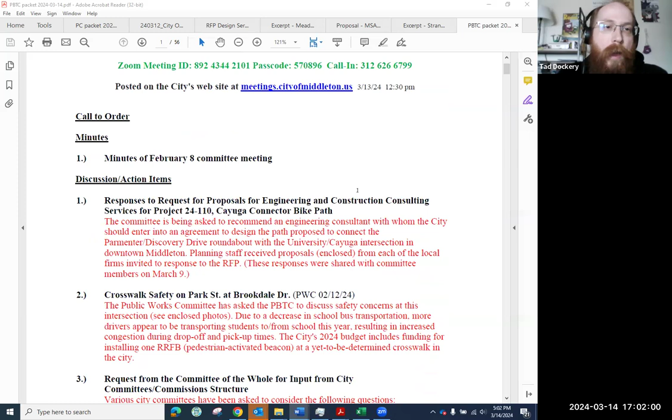Item number 1, response to requests for proposals for the Cayuga Connector.

Yes, I can start with this if you'd like, Tad. So we received 3 responses to the RFP that we sent out, one from each firm that I requested that indicated interest in responding. All 3 of them responded. So if that made sense.

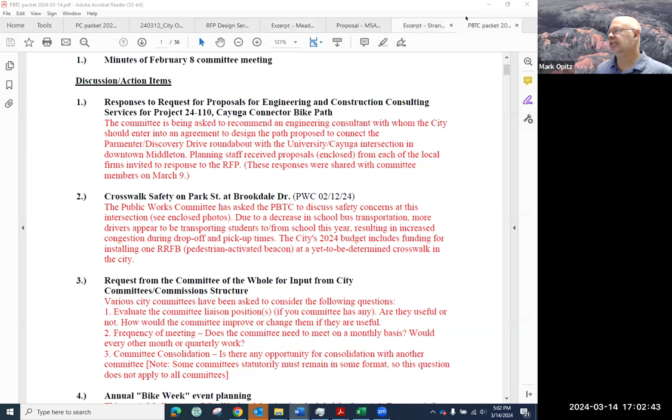And I sent them to you on Saturday, the day after the deadline, and I've gone through them. I also sent you earlier today a matrix, which I don't know how helpful you would find it.

Whoops, this is my work. And this is awfully hard to see, but Tad, I wasn't quite sure if you had a certain way you wanted to handle this. We have the 3 proposals in your packet. We could just have a free flow discussion. If you want, I could share my thoughts on it as well, but I wanted to defer to how you wanted to go about this.

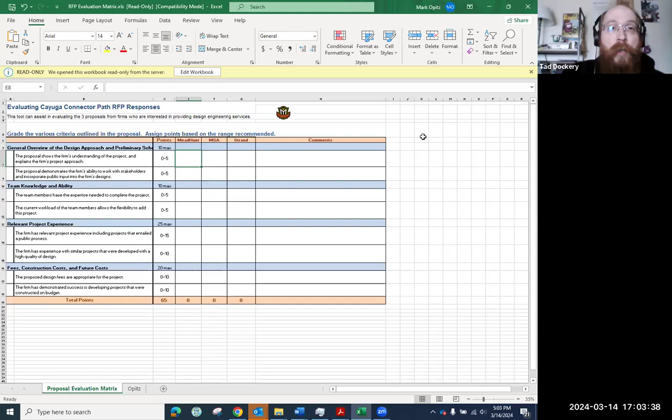So, I recognize I didn't give you this matrix earlier. What I guess I can do is share with you some notes I have. I'm going to put this on a separate screen. I would, if there's no significant objection to leading with Mark, that is what I would like to do. Okay.

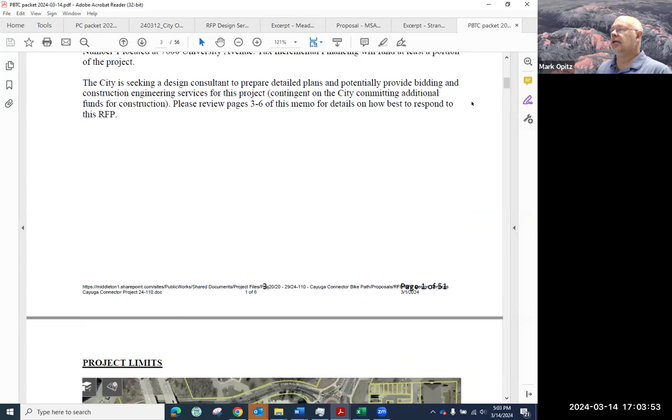So here's the original, here's the path corridor, as you have all seen. And responses that we got, starting with the alphabetical order here. The first one was Mead and Hunt. And what I liked about it, they were all good responses.

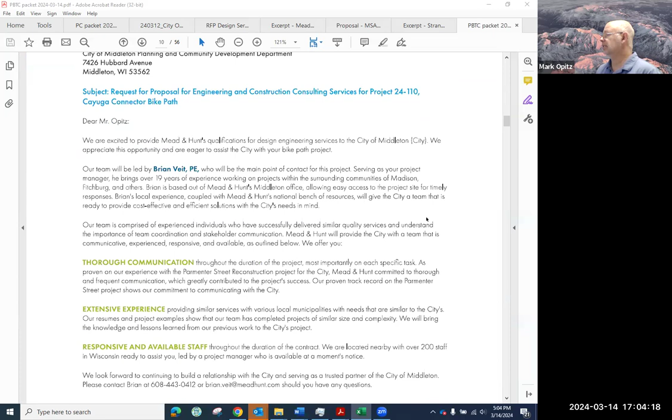I want to start with that. They really did a nice job talking about impacts to real estate and the need for coordination with the DOT. They really emphasized more than the others, a public engagement component. I don't want to just keep scrolling randomly, so I'll just pick a here we go. So they had this page that really stood out to me. I'm not sure how important that is for this project, but I defer to your input on that as well.

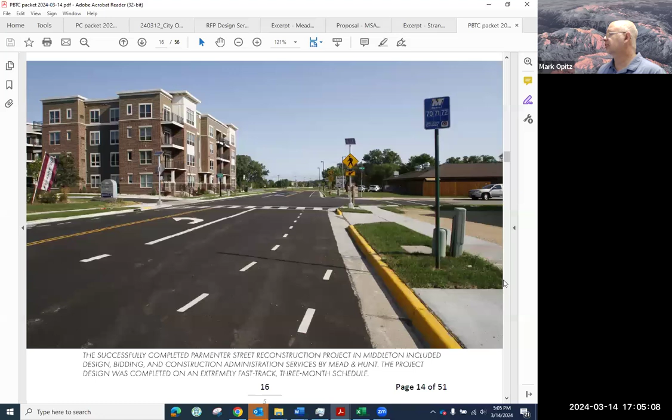It was not something we specifically requested, but it is something that they're emphasizing that stood out. They have ample experience with projects, pertinent projects, including this one. This was the Parmenter Street corridor that I worked with them on over half a decade ago now. So they were the project managers for this corridor. So that was, and then their fee is the highest of the 3 at $87,778. So that's a quick summary of Mead and Hunt.

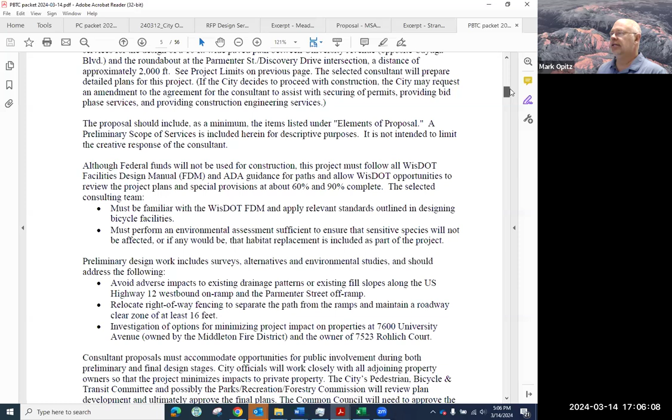They have also an emphasis on a public informational meeting, MSA does. They have emphasized also the need for coordinating with the fire district, which of course is the choke point here, and one other parcel is up by the—oh, let me go back to the map. So the 2 choke points are here at the fire station, and then this corner, which is a multifamily building, the back corner. Those are really the only 2 properties that would have any effect, would be impacted at all by this project. Everything else is right of way.

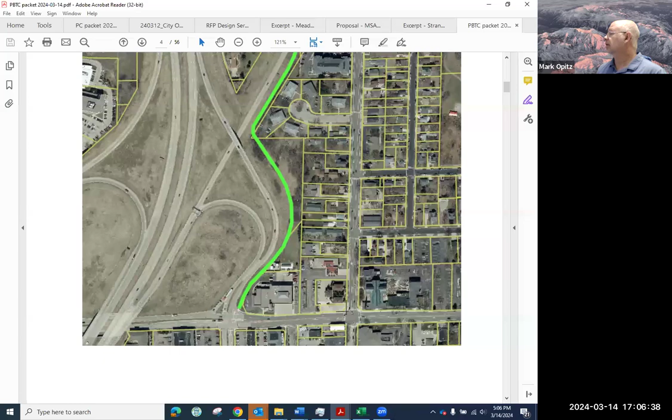So I liked that they recognized the need for DOT coordination, and they spoke about tree impacts and et cetera. Their fee was $75,339. The last proposal is from Strand.

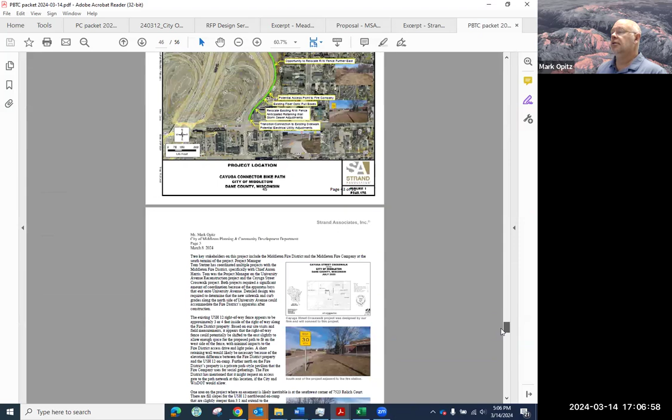Again, alphabetically. Strand is here. Oh, this is—okay, here we go, here's Strand. So Strand, what stood out for me with theirs, or well, several things did.

I really liked this initial survey that they provided, identifying potential issues, which demonstrated familiarity as well as anything. They also have already met with the fire district and talked to them about their concerns, their issues, the fire chief specifically. They said in their proposal that they have had initial discussions with DOT. They have, of the three firms, the most familiarity with the city. Not a requirement, but they have extensive TIF experience with working with projects in our TIF district.

Their proposal didn't call out as much the need for DOT coordination, but it's obvious on the map, and there's other indication in their proposal that they're aware of that. There's no reason to believe, based on past experience, that they don't know how to work with DOT—they have to in their job. So I'm not as worried about that. What they also didn't emphasize was public engagement.

I'm not even sure if it was mentioned, and that wasn't something we specifically called out as an area of emphasis. Because the project's largely in the right of way, any public engagement is something we can handle at the city's end too. So that's just my overview, my thumbnail sketch.

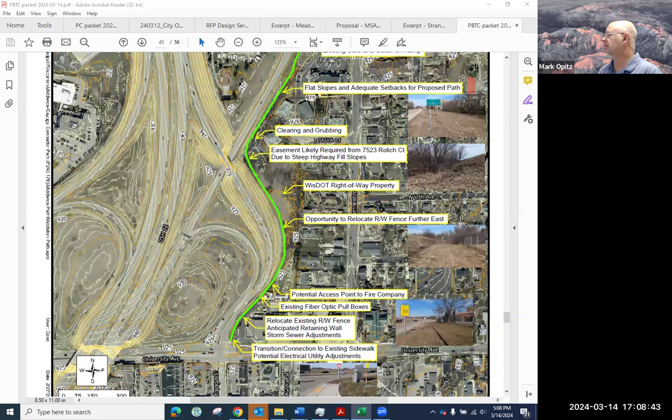I don't want to do all the talking—this is your decision or recommendation to make. So I'll turn it back to you, Tad. Oh, and I'm sorry, the fee for Strand was $49,500, which is $26,000 less than the second lowest. So that caught my attention as well.

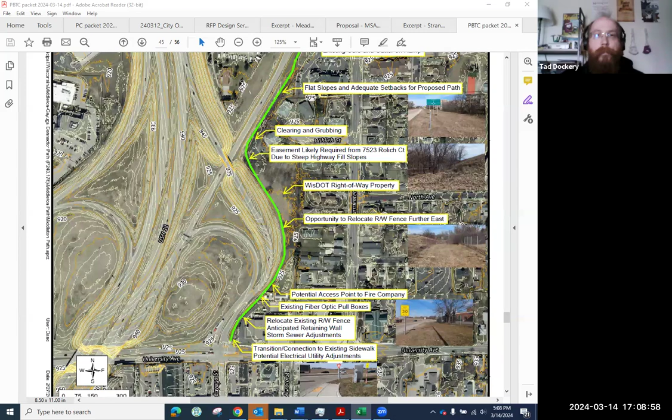All right, Kerrie? Thanks, Mark, for the summary—that was going to be my question. Do we have the costs written down where I can just quickly see them? I know you just said them all, but do we have those? Yeah, so those, let's see here.

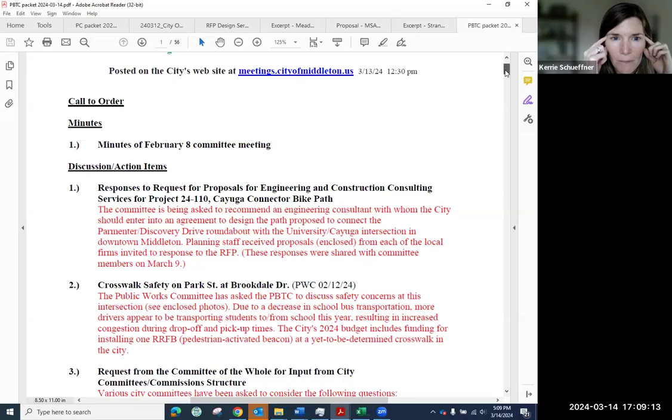This one is Mead & Hunt's. Oh, I forgot to mention that—what I did not emphasize was timeline and deliverables. Mead & Hunt said they would have the final design completed by April of 2025, whereas MSA and Strand both said November of this year. So Mead & Hunt was an outlier in that respect.

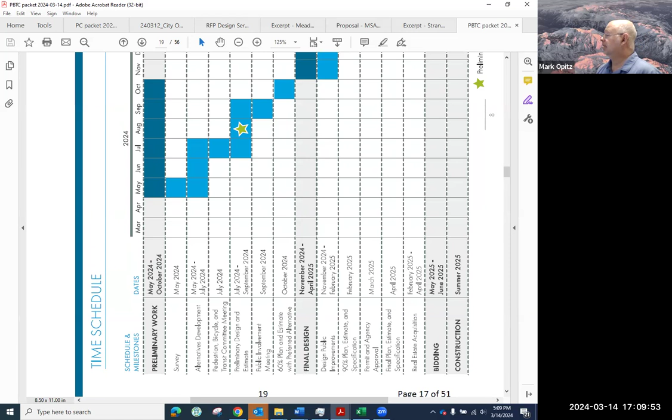Cost-wise, they were at 87,000, and it's in their proposal—I don't remember where exactly. Oh, here it is, right at the bottom: 87,778, based on 663 hours.

MSA was, here we go, 75,338 and change. And they itemized their hours here as well.

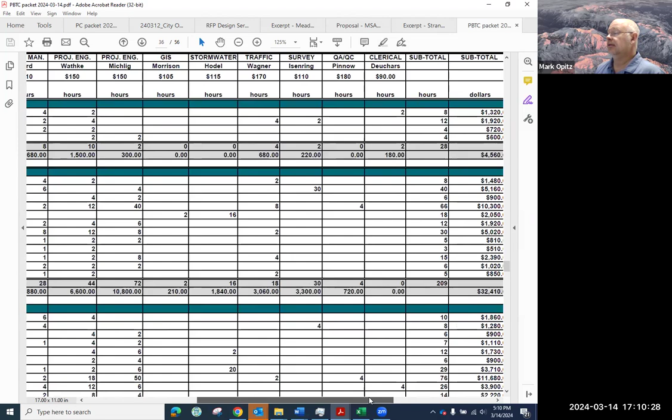And then Strand is, so it's a little harder to glean, but it's right here. Okay, 49,500. So that's pretty significant. Yeah, I thought so too. And that might be because of not including public engagement, those type of things, which, to your point, I don't know if it's necessary as much. But anyways, thanks for that quick overview of costs.

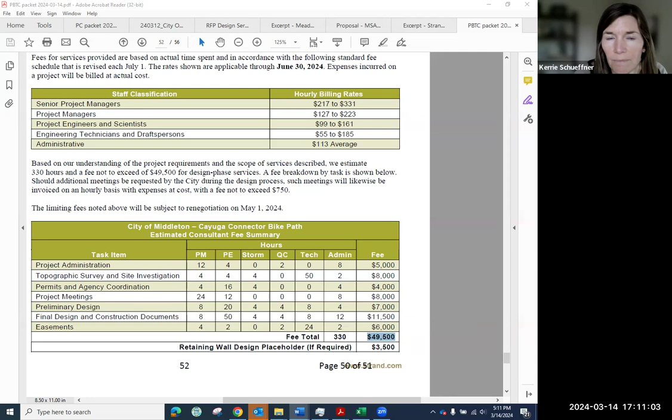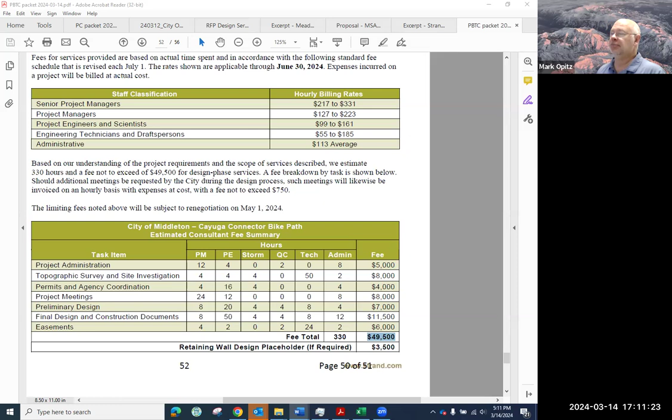Jim? Ted, did you want our assessment now of each? Yeah. I didn't give you much time with that matrix, so I wasn't quite sure. Honestly, I was in vacation mode until Tuesday, so I wasn't as prepared for this meeting as I would have liked to have been, given that these came in while I was gone. So go ahead, Jim.

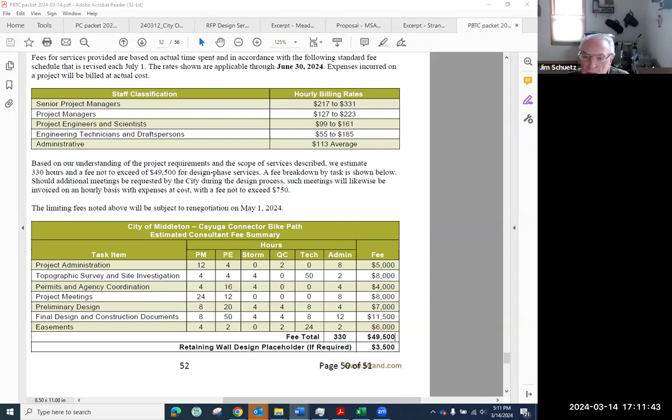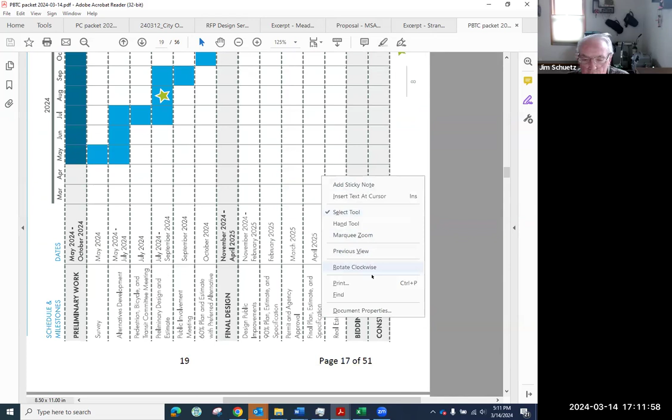Okay, I didn't score it on the matrix, but I looked at it. I didn't like Mead & Hunt for a couple reasons. One is they were taking 6 months for a preliminary design, and another 6 months for a final design. They talk about being ready to bid it, I think, in the spring sometime.

Or was it April and May? It was here, being ready to bid—let's see here. Oh yeah, May, June timeframe of next year. And I'm thinking that by that time, construction companies are quite busy, so I don't see their idea of construction happening in the summer of 2025. I just think this is a little too drawn out.

The other thing is, I think there's a little too much emphasis on public engagement. That'd be quite different if we were talking about this path going along Century Avenue, but for the public, I don't see as much impact on this one. So I really didn't consider theirs.

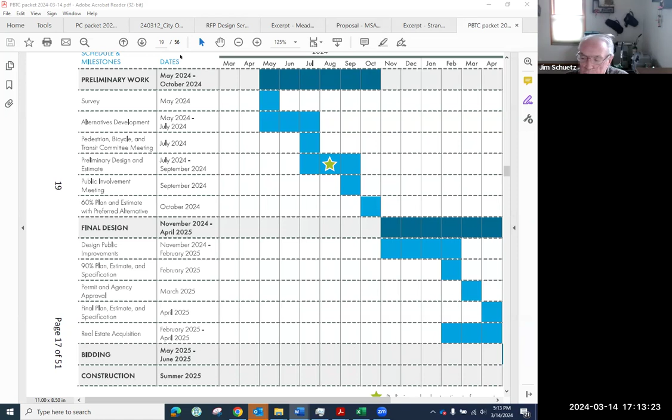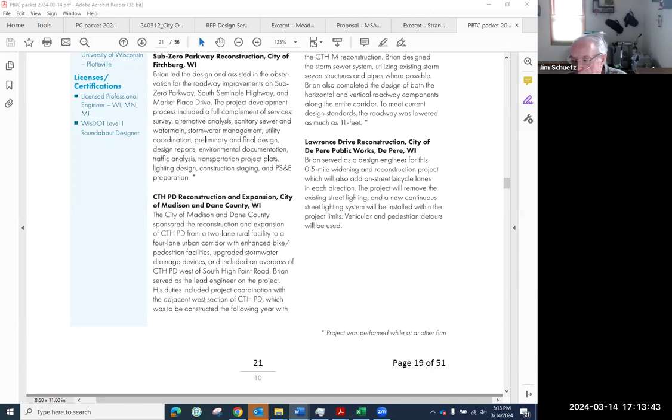The other two, between MSA and Strand, I thought they were both good. I got a sense from them that they really had some effort in evaluating the project. I like that both of them said they could complete it by November, so that would allow for bidding the project in early spring.

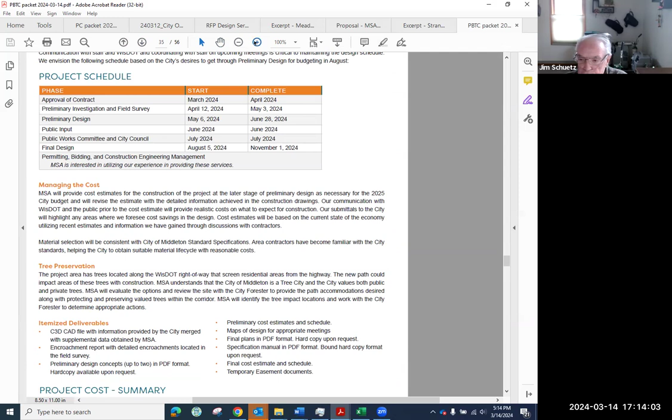Again, what I really liked with this is, with Strand, the fact that they have had that much involvement with the city. And that also—they went into quite a few specifics where they could see potential problems or issues that had to be addressed. So in my opinion, I thought Strand had the best bid.

There's a couple hands up, Tad. Yep. Kirsten.

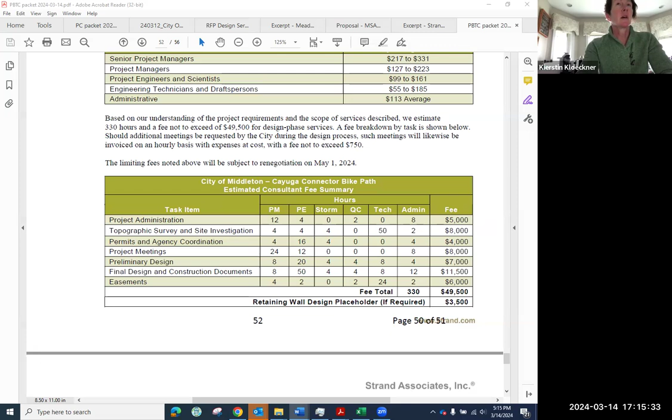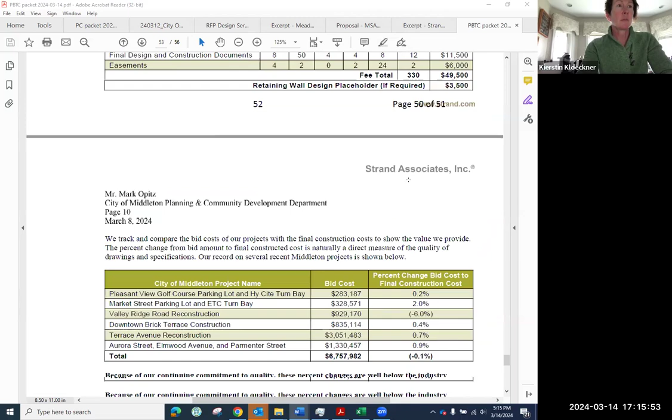I went through all these as well, and I agree with Jim on the timeline concerns. I've worked with Strand on several projects, and I know they've done several projects in Madison as well for bike ped infrastructure. They've been tested and true, haven't heard of any issues with them. My only concern is the price discrepancy. I'd be curious when we're seeing a discrepancy of almost half of the highest bid. That does raise some red flags, so I'd be curious why Strand's rate is so much lower than Mead and Hunt. If we saw a $10,000 or $20,000 discrepancy, that's one thing, but when it's that big, I'm wondering if they're leaving something out, and we just want to make sure of that.

But I did like Strand's proposal the best as well. My only response to that, I don't know the answer why theirs is significantly less. That is unusual to have such a range. But I have every confidence that they have a comprehensive view of the project based on all the work they've done with other projects over the years. And I did check with the city engineer about all three firms. He said he considers all three of them perfectly qualified, they've come in within budget with no concerns about missing things, and he would have no hesitation to work with any of them. If that helps allay your concerns.

By the way, what I envision coming out of this discussion is hopefully a consensus or a motion to recommend one of the firms, which would then be a recommendation to staff or to the council. Before it goes to the council, we would reach out to that firm and put together an agreement between the city and the consulting firm. That would probably be done for the April 2nd council meeting.

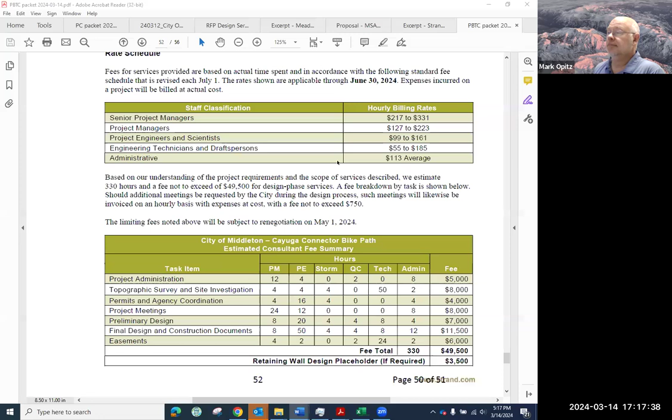More hands up. Ted, oh, we can't hear you. He's trying to tell us something, he can't unmute himself. I just asked to unmute. Nothing's happening, we can't hear you. I can't read lips, I'm sorry. Ask to unmute again, anybody else get a sense of what he's saying? No, I can't read lips either, but he's clearly concerned. I think he's asking to unmute? Are you unmuted? I've tried asking to unmute several times. John. Oh, he's calling on John. Oh, okay, he wants John to chair the meeting.

Okay, all right, thanks, sorry, well since my hand's up, I'll just say I have worked with Strand and found them to be very, very great and nice. I think part of the discrepancy issue, as I see it, is seeing this in home repair stuff, that it's not that big a job. So for some of these companies, they may be busy and not that interested in a job considered smaller, so they just bid high. But I'm totally comfortable with Strand, and I don't think the $40,000 difference in the price tags is going to make them screw up this job. So that's my feeling about it.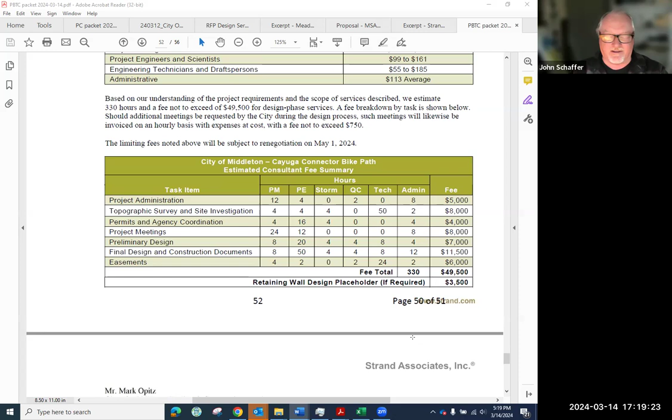All right, Carrie, you've had your hand up for a while, go ahead. I was just going to say the same thing, I agree with Jim's assessment and your comments. My vote would be for Strand.

Okay, Mr. Rhodes. So I did fill out the matrix. MSA and Strand came out the same on mine. And being the steward of the district's money, I would say Strand would come out on top there as well. That would be my vote. What did you say about MSA? It came out the same as Strand, I had them at the bottom when I did the sheet. They came out tied.

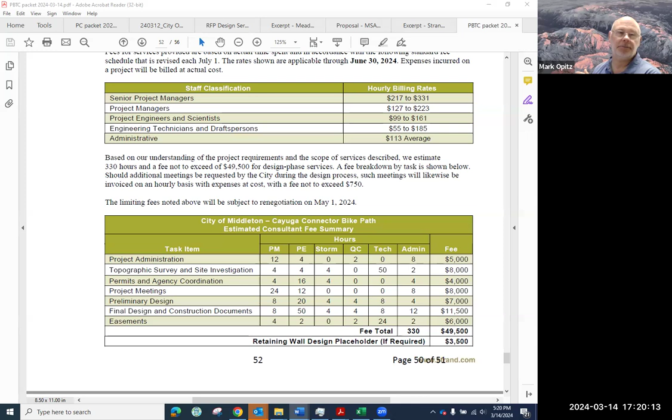Oh, so Strand and MSA were essentially comparable, is what you're saying. Yep, okay, got it. You can save $25,000 if you go that way.

Well, since I'm unofficially chairing this, I'm hearing a sense of a consensus. Maybe this is the time if anyone wants to make a motion to look at going towards Strand.

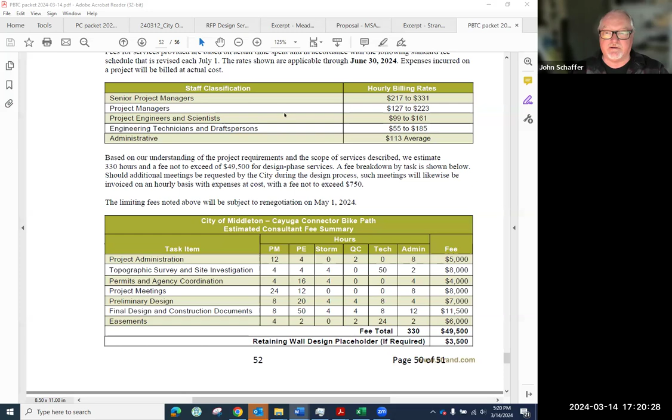I move we go to Strand. All right, we have a motion. Do we have a second? I second. We have a second, but I didn't know who seconded - somebody's taking minutes on this. John, you recognize who the second is, and I will record it. Kirsten seconded, and Jim Ray. All right, so any further discussion with the motion on the table?

Tom, I wanted to bring up one thing - is there any way that we can change the name of this project? It's listed as bike path rather than a trail path.

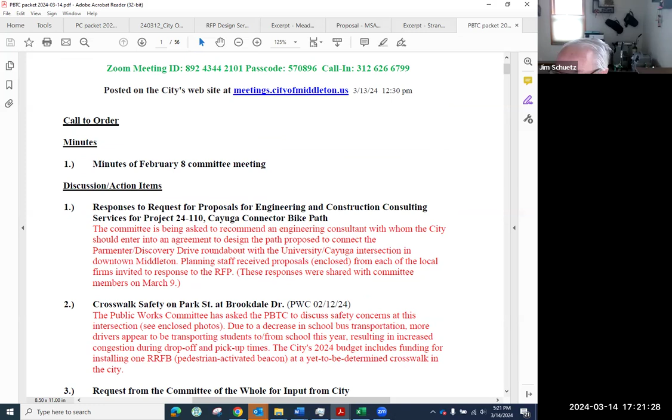Cayuga Connector - I've just always called it the Cayuga Connector. Is that the concern you have, or do you have a concern with the word bike? I have a concern with the word bike. Yeah, I understand, it doesn't need to have the word bike in it. I don't even know why I called it bike path - I might have gotten that from our system, someone had called it that. I'm happy to make sure we call it the Cayuga Connector Trail or shared use path instead. That's fine, as long as the contract is saying the same things, it doesn't matter what the title is.

Ken, you have your hand up. Mark, a while back we talked about the National Bicycle Trail going through Middleton - is this going to be part of it? No, that comes down Parmenter Street, on street routes. I think interest in signing that has petered out in the region. I haven't heard anything about it lately. But I really like that idea because it does use paths in certain jurisdictions, and I don't see why, if it comes out at Cayuga, it couldn't ultimately go down Elmwood Avenue. So we could route it that way eventually, but let's not worry about that right now. That's an interesting idea though.

All right, Jim, you and I share the same amount of hair on top, but I'm only seeing the top of your head. You might want to adjust your camera a little bit - I've got from your glasses up. There you go. Thank you. That's better. Much better. Move back a little? You're better looking than I thought.

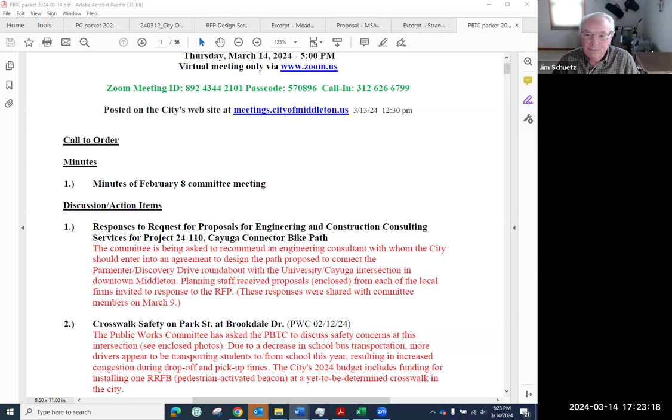So that's it - it's to recommend entering into an agreement with Strand. That's correct, Strand, sorry. Okay, that was the motion, and that was Tom's... so it was Yost who made the motion, right? Yes.

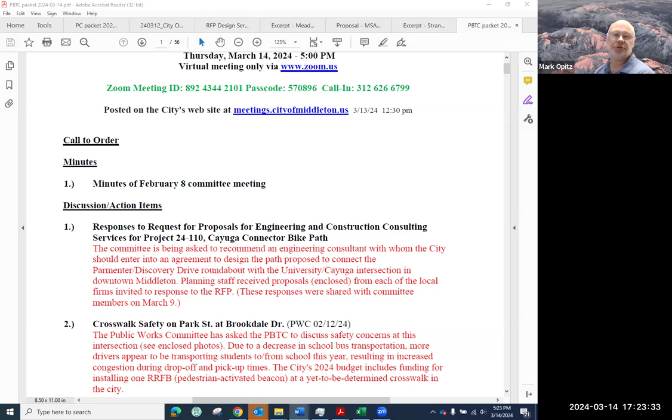Okay, thank you. Tad, you're still out of commission? I am back. No? Oh good, you can take over again. I'm sorry we couldn't understand you right away. No, I apologize, I was looking at the proposals and letters. That was good, except it was... even it was the right way - well, right way for him, but they were backwards, but it's okay.

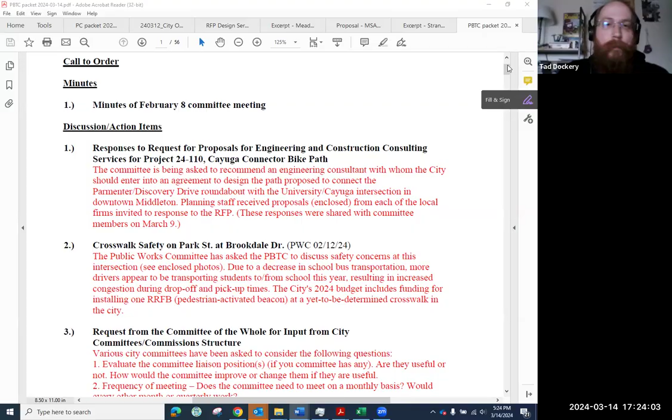All right, so moving on to crosswalk safety on Park Street at Brookdale Drive. Carrie, would you like to lead with this? Sure, this was a referral from the Public Works Committee. I brought this up to Public Works, and unfortunately I wasn't at the meeting when they discussed this, but they referred it to Ped Bike, which I think is great.

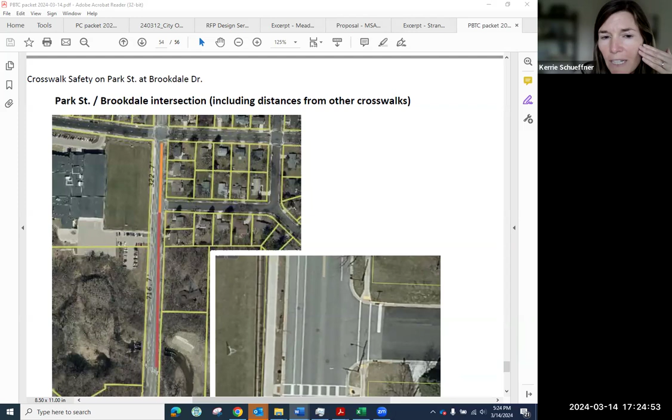I just wanted to see what options we have for pedestrian safety at this intersection of Park Street and Brookdale. Kromrey is on the left here of our screen, and I have two daughters that go to Kromrey, so I'm really familiar with the pickup situation there. A couple months ago, at that crosswalk, there was a child on their device walking across the street, and a car was coming, and they basically just barely missed - it was so frightening that I was like, I need to bring this up to the committee to see what we can do.

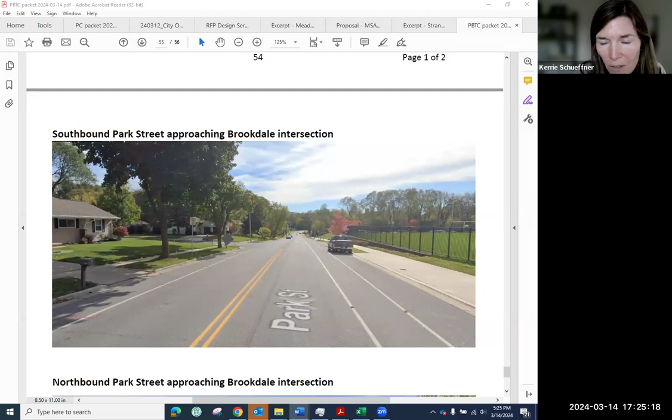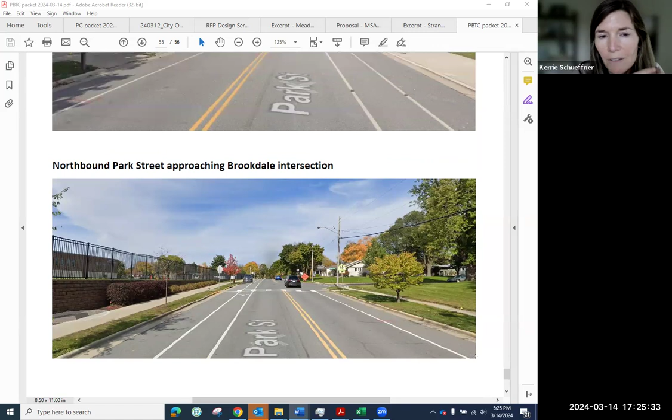What's happening is that parents are parking on Brookdale, and kids are coming down the sidewalk and crossing over to Brookdale. There is a crosswalk, so they're using that, but there's a lot of traffic at that time of day - high school traffic, kids coming in, Kromrey parent traffic. There aren't sidewalks on Brookdale unfortunately, but people are still using that for pickup. Ideally it would be great to have more crossing guards at Kromrey. The four-way intersection is also problematic.

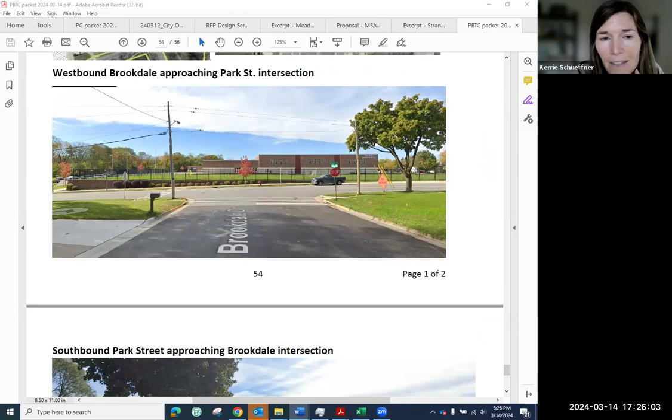This in particular, I just saw this happen, and my daughters have also commented on this as well. I don't know if anyone else on the committee has concerns about this, but I just wanted to see if we have any potential solutions. And then that four-way intersection is another area.

There is the lighted crosswalk - what do you call those again? The RRFB, the rapid rectangular flashing beacons. Yes, that's it. There is one of those down further on Donna Drive at the main entrance to Kromrey, which I think is helpful.

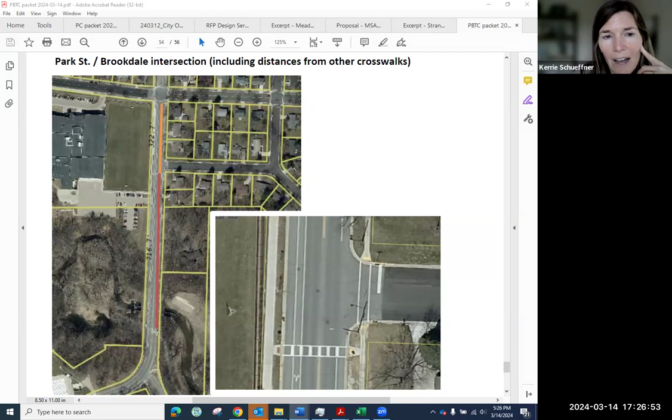So one option is maybe having another lighted sign there. I think a crossing guard would probably be even more effective, but I don't know where the funding comes from for crossing guards - is that something the city provides, or the school district? Anyways, that's the topic I wanted to bring up.

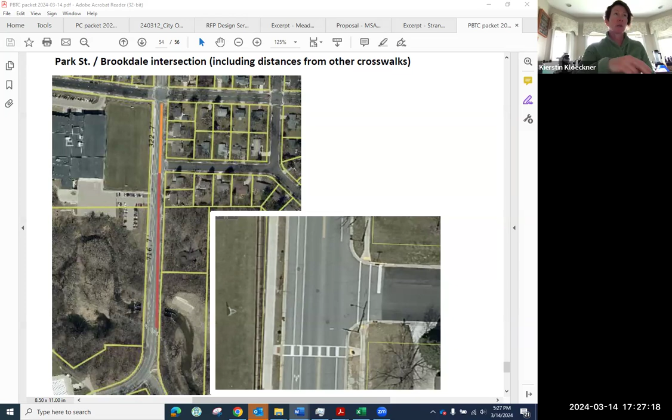Yes, I walk that area a considerable amount, and I think one of the biggest issues is that during school pickup and drop off, all of the cars are parked along that section, and so when kids start to walk out, they're almost invisible walking - it's almost as if they're walking through cars. We have the RRFB at the path, the creek path, and then the RRFB on Donna.

One thing we could try is having the flags - I think having another RRFB that close to the creek path RRFB might be troublesome. We could try having the flags, the bucket with the flags on each side. I think a crossing guard would be great because traffic in that area is high speed and very congested at both rush hours. I have seen a lot of drivers drive very recklessly there, even though police officers are oftentimes there.

But one of the problems is the parked cars, and that blinds that area when kids are crossing. But we can't get rid of the parking spots because parents would have a conniption fit. So I'm wondering if we can also use paint to highlight that area a little bit more, the green paint, or any type of raised crosswalk area, just to make them a little bit more visible.

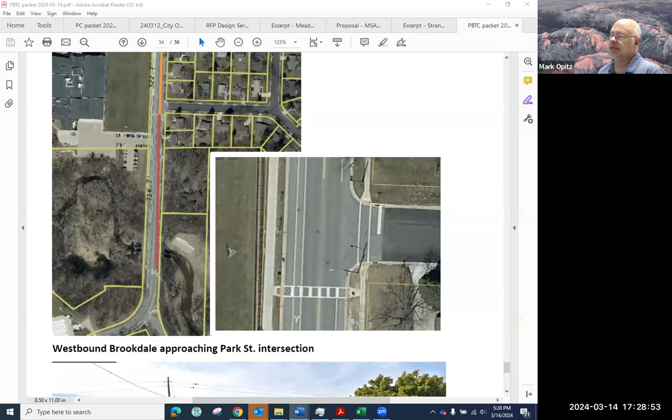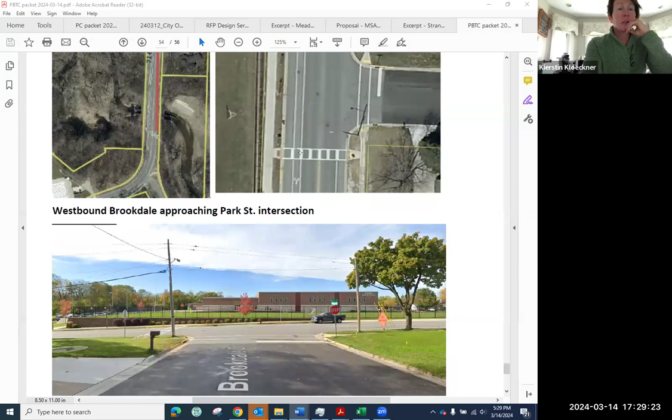I don't, but I can tell you that that's almost always blocked, during school. Actually, here's the answer - you can see the yellow paint here. Yep, so 15 feet - I want to say 15 feet. That was my guess, but the point remains. This is a good example - it shows how a kid that's leaving the sidewalk and entering the street is not going to be seen right away. It's probably very hard to see, especially for you, Jim - sorry, what I'm pointing to. But if you could have - let me blow this up here.

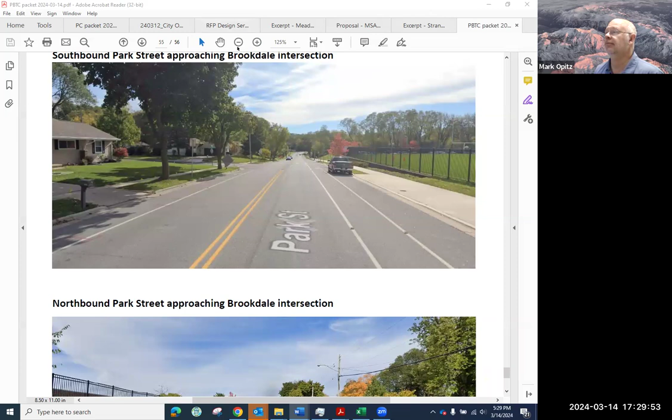You know, if there was something built, if this were a curb extension that came out, that would help. Just an idea.

I think those are great ideas. The other thing I wanted to mention is there are 5th graders through 8th graders. Sometimes I've heard there's not as many crossing guards because they're saying they're older kids, but these are still really young kids. 5th graders are still 10 years old.

Could we do a traffic calming median there that would slow traffic down? Do we have the room with the bike lane? I guess we would have to bring the truck back or the parking back too.

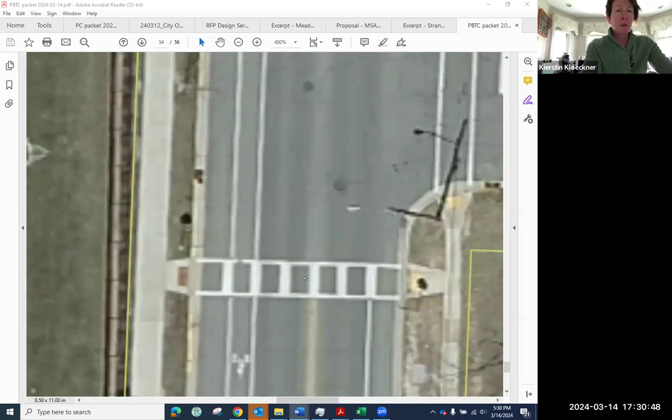Oh, I apologize for that. But I'm wondering if we could do a median in the middle as well, and that would narrow the lanes and act as a calming device.

The effect of that would be, in order to keep the bike lanes here, you can see where I'm drawing, this would have to have a median that is, 6 feet is ideal, but we might not have that much room. 6 feet can hold a bicycle as it's crossing the street, but you would have to lose the parking lane back here. It'd have to taper down and then taper back. So you'd probably lose a parking space on each side, but you'd gain the median then.

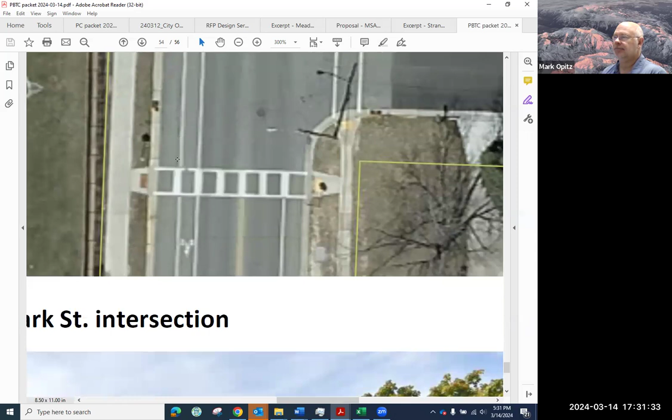I like the idea though, Mark, of your bump out. If you had the bump out back enough that it actually kept cars from being too close to the crosswalk. So imagine a bump out that was say 20 feet long. That would mean no car could accidentally or purposely go past into the yellow curb and park there, and guarantee that you'd not only have the bump out, but you'd get a blockage of a view. That couldn't happen because the bump out was far enough.

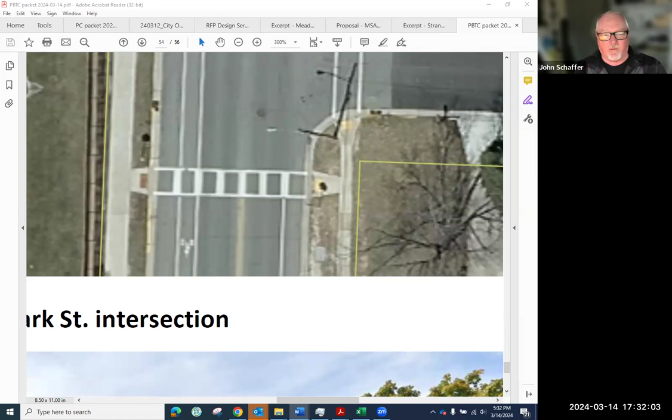That seems to me more logical because the street's pretty narrow there, and trying to put something in the middle is going to cause maybe more complication because now cars will be swerving over towards the right side and the kids are there.

Well, there's the bump out, I mean the median, at North Avenue and Park Lawn, and that sign gets hit quite a bit. Yeah, let me just go to that.

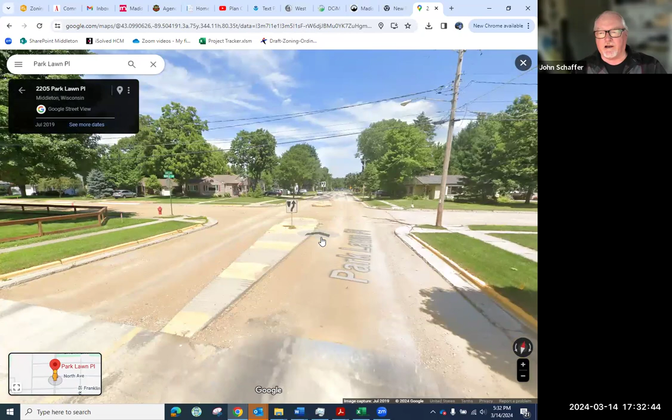The only disadvantage I can think of with the curb is the snowplow drivers. It's gonna be harder to keep that clear. But that's a diminishing worry now, right? Well, yeah, so this is an example of what Kirsten was mentioning. What an old photo, wow.

I think an object like that is probably better than the light. So yeah, I would say this is 15 feet. Actually, there's, yeah, see, you've got the fire hydrant.

If you somehow did a bump out so that you started right after the fire hydrant, so essentially nobody could park within 40 feet or so of that, you'd lose literally one spot is all you'd lose. The only other concern is drainage.

Playing the role of engineer here today, the good thing is that this inlet slopes down this way. So the water would come in here, and then you could design this so that it would bump out, and that probably wouldn't be a big problem for drainage at all, actually.

No, I think you could just move that drain thing a little better, funnel it down somehow. Actually, I like that it's there, because then you bump it out and the water's not going to get blocked. So I think actually this could work really well.

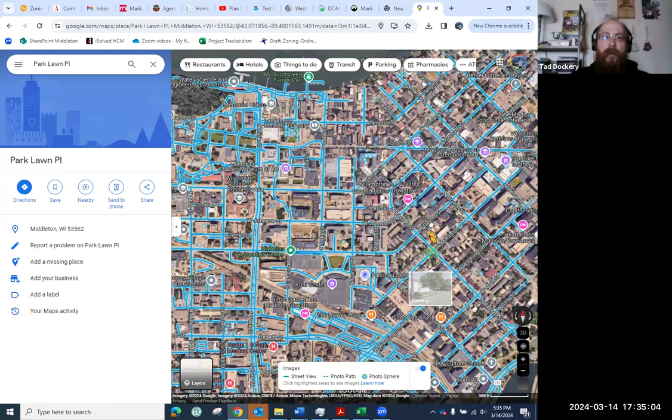A way to avoid drainage issues and still get your bump out would be to swap the position of the bike lane and the parked cars, so the bike lane is interior and defended by the parked cars. That's what most cities are doing now. Then have the bump out floating out from the curb. You'd still have the bump out pushing cars back, and it wouldn't block the drain channel, which could make the engineering easier.

So this is a bummer, I was hoping this was done. What Tad's describing is unfortunately not available on Google Street View yet.

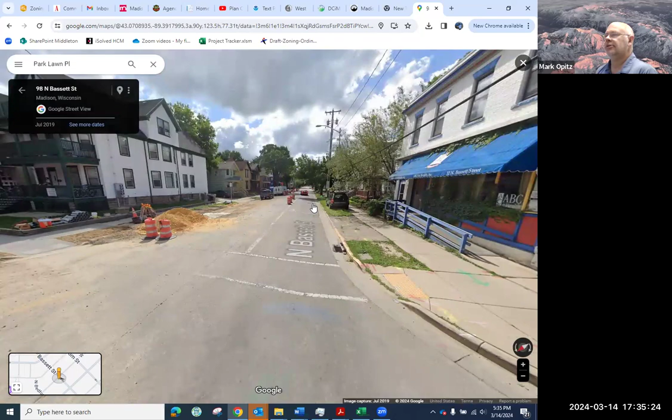There's an example on Bassett Street in Madison where this has happened. Is there another local example you can think of, Tad, something that's been in place for a while? I can envision it, but... oh, actually, here we go, the aerial photo works. This is even better. Yes, exactly like that.

Not sure if there's quite enough room on Park Street to do this, but this keeps the bike lane to the right of the vehicles where they're parked.

Kerrie: Normally I would like that type of bike lane configuration, except in this situation where people are dropping their kids off, the chance of getting doored as a cyclist goes up much higher as kids are jumping out of the car from the passenger side. Good point.

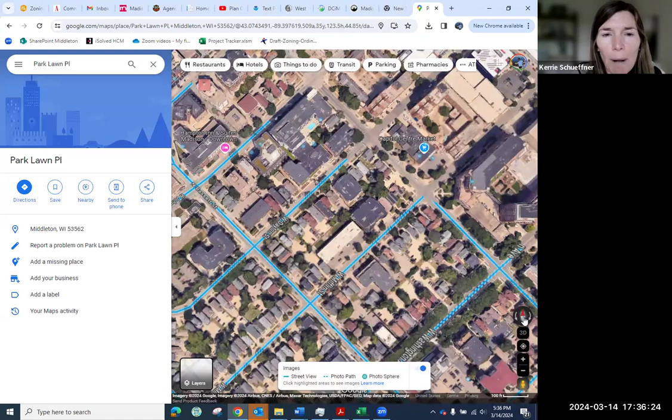I also wanted to mention this is probably a major issue for like 15 minutes of the day during the school year, mostly at pickup time, not even drop off necessarily since drop off is more staggered. But at pickup, everyone's trying to get there at one time. So that's why I like the idea of the bump out. But crossing guards also come to mind as a solution, though I don't know if that's something the school has to ask for.

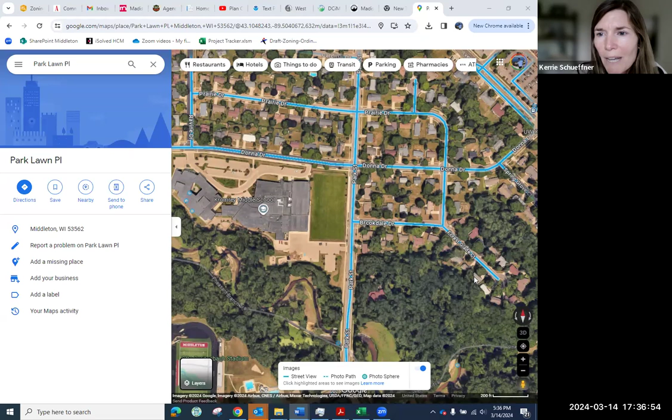I don't know the process for that. What I have heard is that staffing is an issue, they have trouble getting crossing guards, but I don't know how pervasive that is, if it's as much of a problem as getting bus drivers. John, you would know about bus drivers. I know about bus drivers.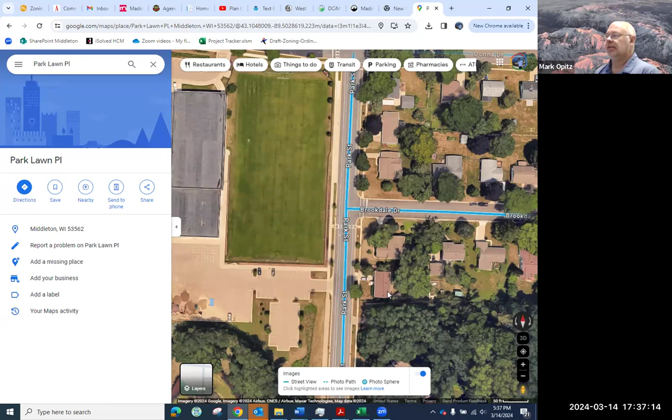There is a crossing guard, I believe, at Kromrey now, over at Ravine or Northbrook, one of the two. Isn't there one there now? Yeah, at Ravine. Oh, and that's a good example of where there's a median in the middle, which I think has a benefit in terms of channeling traffic, but it makes this left turn a little weird for people. Still, pedestrian safety is the most important factor.

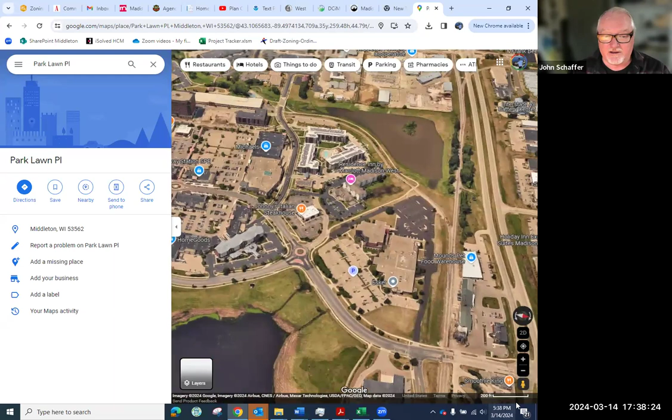So I don't have a strong opinion on this, but this is one of the options we were talking about. Further down on Park Street by Terrace, when we put that little island thing in the middle, it got rid of 90% of the problems of people not knowing whether they're supposed to slow down or stop. It forces people to pay attention, and maybe that's half the issue, just anything that causes somebody to not just drive but pay attention that there's something there. I think a bump out or a center island would both do the same thing.

My question, though, is I don't walk by here, but I do pick up middle school kids on buses, and the thought that they all walk down the sidewalk until they get to that crosswalk and cross there - my sense is that doesn't happen much at all. They're probably just bolting across the street anywhere they feel like it. It may be a problem that can't be fixed.

I don't know, this is the bump out example, and at Greenway Station we've got some of these. Jim: the thing about the island in the middle, I think that can work very well for traffic.

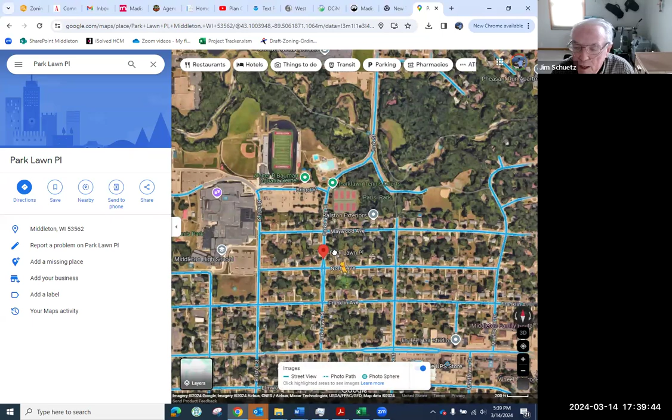But if we're talking heavy pedestrian use, what happens there in the winter is the crosswalk part of the island doesn't always get cleared. And so if you've got a bunch of kids, as you said, a lot of them just avoid things like that, so I don't know how helpful that would be.

So you're saying that this part doesn't get shoveled out? No, it probably does initially, but what I'm thinking of is when the snow plows go through again, that has a tendency to get a lot of ice buildup there. You'll get some people who live on the corner that might go shovel it out, but for the most part, it just stays that way. Yeah, and so what you wind up doing is you wind up walking around that.

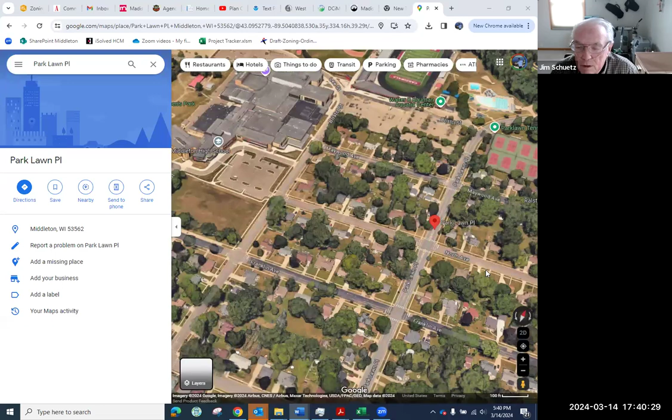Whereas the advantage of this curb extension is that it's an extension of the sidewalk, and so that gets cleared by the adjoining property owner as a matter of course. Mm-hmm. Yeah, see, now I like that long extended one you just showed over there.

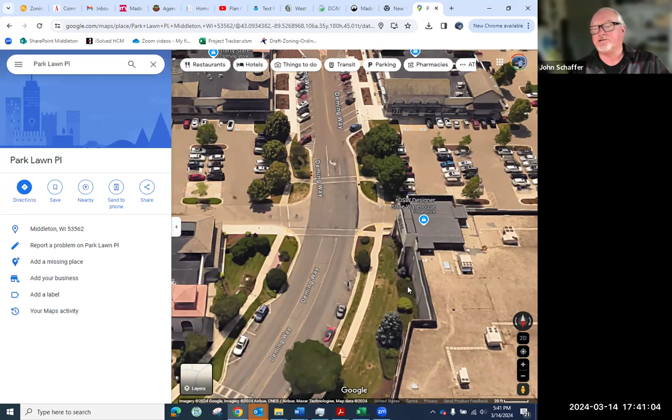I'll do an air photo view. Sorry to fly around all the time. Yeah, it just pushes it back to make sure that cars are well aware that they're not going to get real close to that intersection. Personally, that's my favorite choice here. Or a crossing guard. Makes sense.

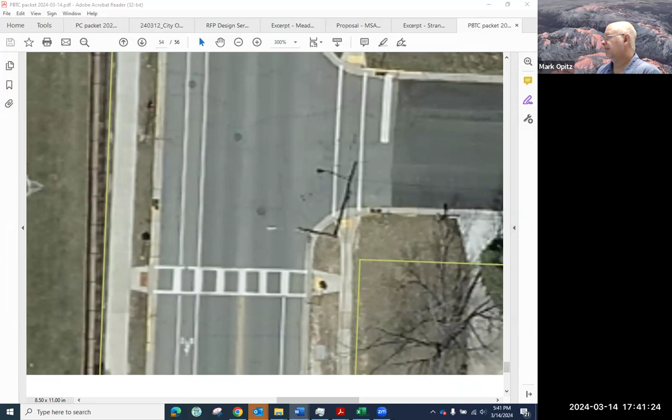So is that the feedback from the committee then? There's a couple hands up still, Dale? Yeah, so I have my meeting with Jared tomorrow morning. Let me just bring it up to his attention and see if there is funding for a crossing guard and what the problem is getting them out there. I'll just run it by him.

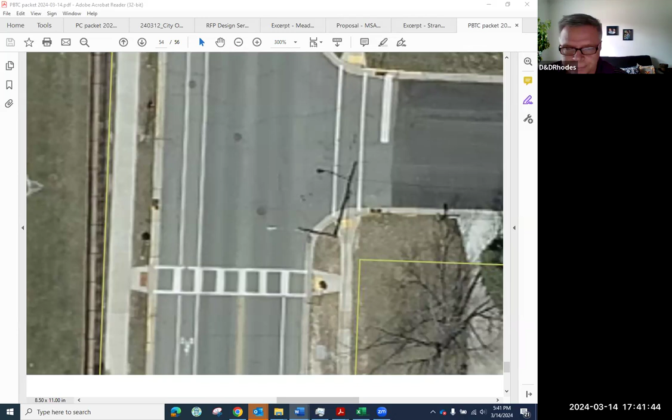That's the principal. No, he's the district finance guy. See if he's—oh, got it. Yeah, Jared's position, Dale's deputy.

If you do talk to him, I mean, the other area is the four-way intersection—maybe that's even a better place for the crossing guard, because there just seems to be a lot of people that don't know how to use four-way intersections, and there's a lot of kids crossing there too.

The beauty of a crossing guard is if somebody literally walks out in the middle of traffic and stands there. As a bus driver, I encounter them all the time, and it's very clear there's somebody there, and they can deal with odd and unusual situations—they just get out there. In some ways, if they could afford one, that's cheaper than rebuilding the whole street.

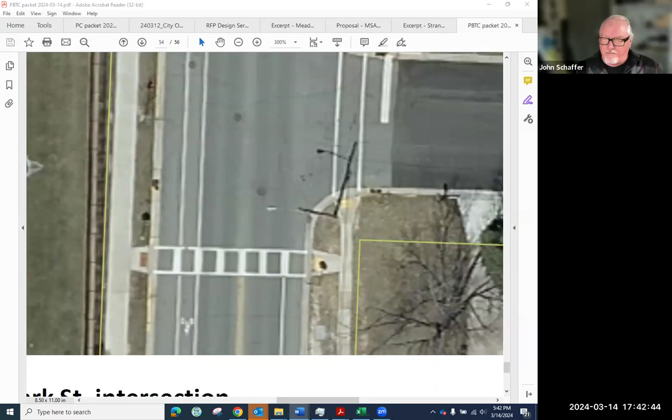Yeah, I agree, John. There's one at Park Street and South Avenue. Mhm, and that's tremendously helpful. Yeah, and there's that lighted sign at the top of the hill, right? But this is like, the crossing guard is really what's needed there.

And Ken? Those kids are walking to Elm Lawn. Yikes.

Yeah, it's just, I'm looking at this, and you're supposed to be driving 15 miles an hour through school zones when children are present. And it comes back to police enforcement, but it's the recognition of drivers that they're in a school zone, even with that sign there—it's just frustrating with the lack of reasonable drivers in this city on a lot of occasions. So that's my only comment, just a shot in the dark on that. Thank you.

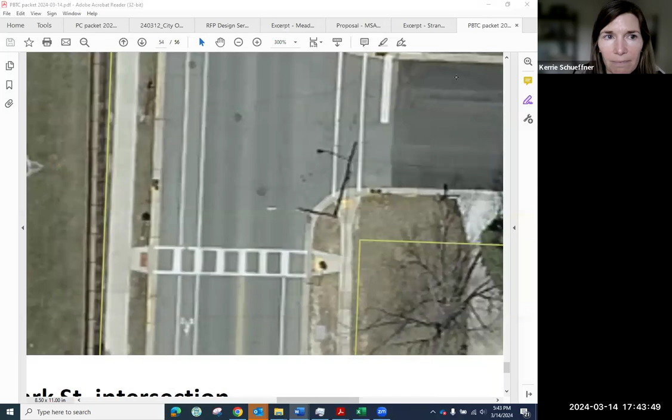Thanks for all the discussion, I appreciate this. So it sounds like at the moment our recommendation is for Dale to have his talk tomorrow.

Yeah, I think if that's not an option, then there's some preference at least towards a curb extension or whatever—a bump.

Okay, Mark, clarify something for me. If we're going to wait for Dale to have his talk, what do we need to do? You can just defer this. If there's not a motion, just a conversation tomorrow, you don't have to take action on this now.

All right, sounds good. Or what you could do is take a position indicating the preference for a crossing guard, but if that's not an option, what's your fallback idea? You could articulate that as a motion if you want. Yeah, it strikes me this is not something that requires a motion—they're just looking for general guidance and recommendation. Right, it's sort of embedded in the minutes and everything.

So I'll just reflect in the minutes that the consensus is determining whether there's an opportunity to have a crossing guard there, but if that's not an option, then the curb extension is the preference. That's what it sounds like to me, yeah. Yep.

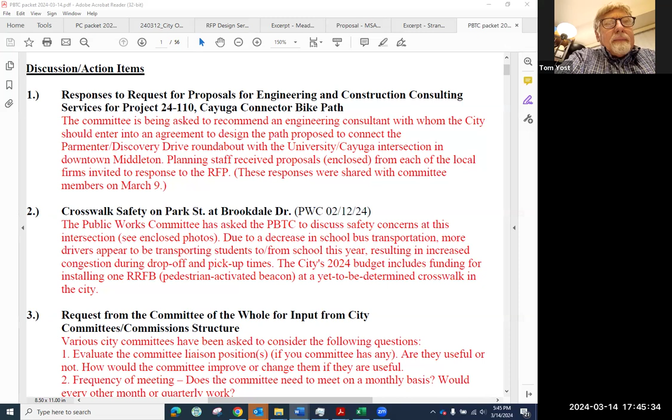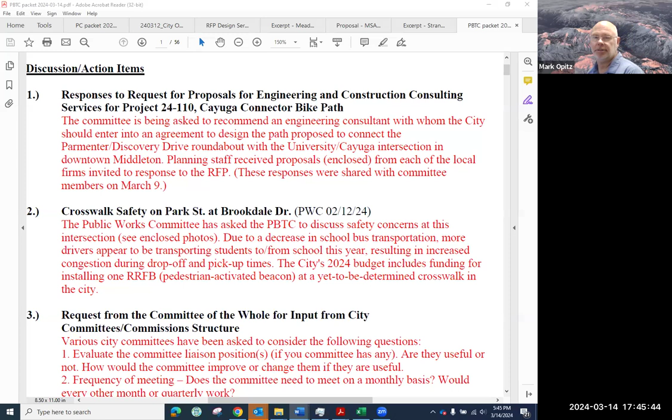Shouldn't we include the specifics of Dale making a contact or not? I'm indicating in the minutes that Dale, as the school district representative, is going to internalize that discussion. Okay, it's fine. That's good feedback.

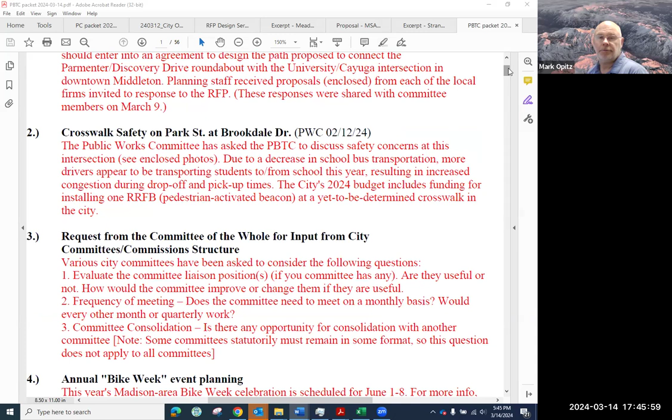You ready to move on, Tom, or what do you want to do? Well, it's 5:45. There had been discussion about wrapping up soon, and I know Kerrie also has a time issue. My question then is, do we have interest in dealing with these next two items right away, or are people okay with deferring them until the next meeting?

Do we think we have time? Who wants to dig in? Jim, I would say we ought to defer it. I think the next topic might generate quite a bit of conversation, and so I would recommend probably deferring. And if we don't have to address the bike week issue, let's just defer both of those for the next meeting.

Yeah, I concur. If I could say about number 3, because I'm on a council, there's a general discussion about whether we have too many committees, or too many people who have to sit on multiple committees because we have liaisons here and there. It's a big overall process in the city looking at what the committee structure should be, and whether every committee is fine as is, whether we need more input from somebody else, or too much input from somebody who doesn't need to be there. So I think that requires a little thought and discussion and time, and I would certainly opt for postponing number 3.